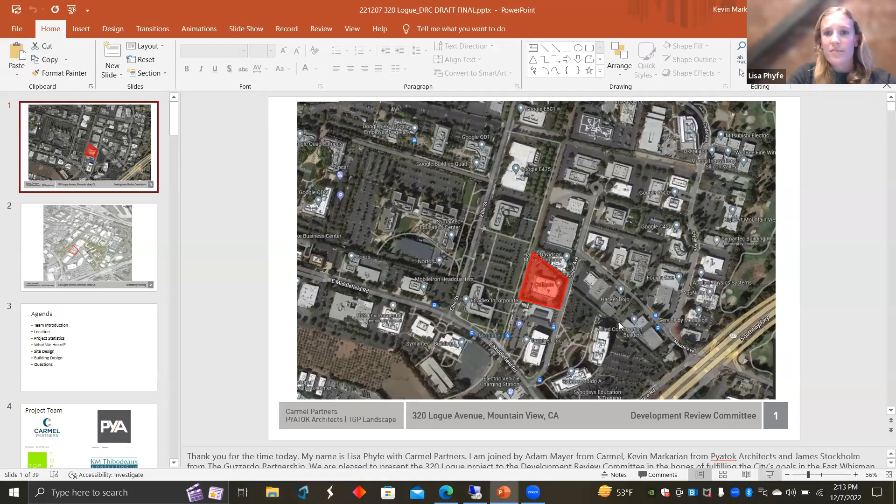Thank you to the Development Review Committee for your time today. My name is Lisa Phyfe with Carmel Partners, and I'm joined by Adam and Greg from our office, as well as Kevin from Pyatok and Daniel and James from the Guzzardo Partnership. We are here today to present the 320 Logue project to the DRC committee for the second time. Next slide.

As a brief reminder, the 320 Logue project is located within the East Whisman Precise Plan, right adjacent to the VTA rail, and is in the vicinity of the Google Middlefield Master Plan project. Next slide.

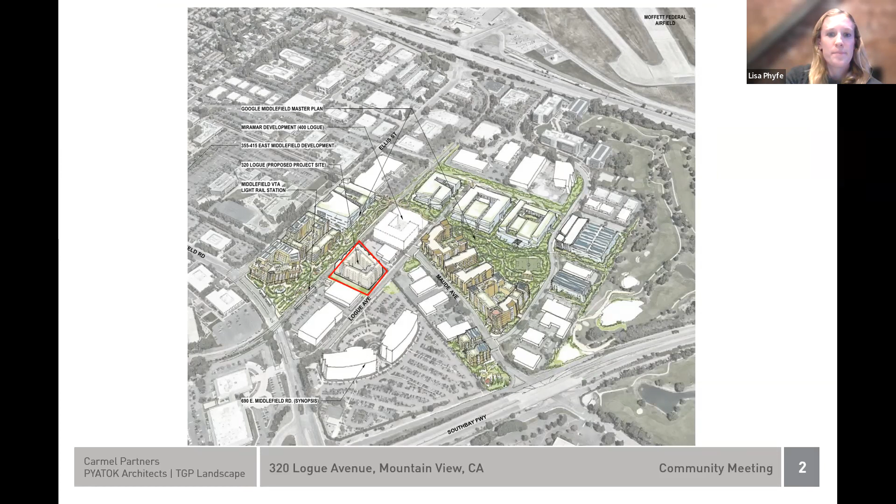As a brief agenda for today, we're going to briefly introduce the project, go over a few items that we heard from our first DRC hearing, and then we will present the updates to the site and building design in response to that feedback. Next slide.

As a reminder, the project team: the developers, Carmel Partners, and we're joined by our architect, Pyatok, and landscape architect, the Guzzardo Partnership, and Kathy Thibodeau is our community liaison for the project. Next slide.

As a brief reminder, the site is a 2.14 acre site. We are proposing a project with an FAR of 3.5, which is 366 units, a mix of studio, 1, 2, and 3 bedroom units. There are 55 on-site affordable units. As Rebecca mentioned, the proposed project is 7 stories over 3 levels of subterranean parking that include 412 parking stalls and 412 bike parking stalls. Next slide.

Coming out of our first DRC hearing, we got some feedback on our site design, the building base, the corners, and the Logue facade. At this point, I'm going to turn it over to our design team, Daniel and Kevin, to touch upon our progress in response to these comments.

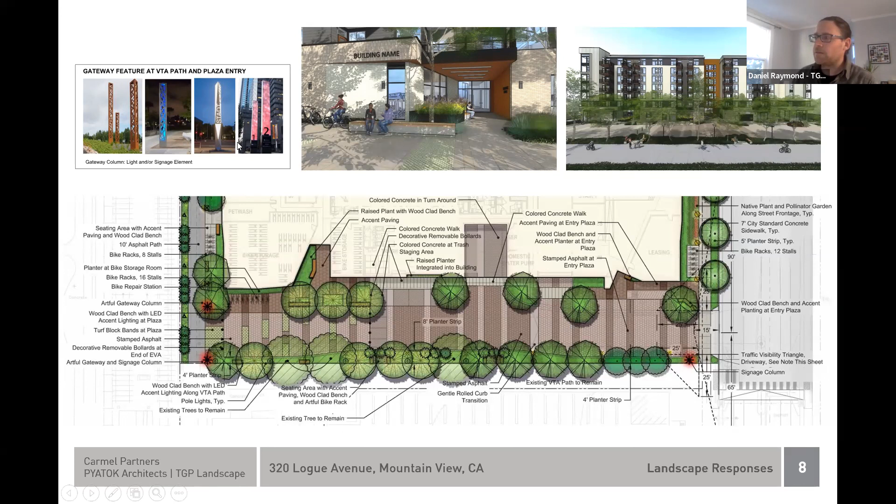A few other comments on screening the utilities on Logue: we're a fan of using planting to do that instead of a built structure like a fence. Here are some planting options that do a great job of screening utilities, and the majority of these are native plants.

There was also a question last round about the screen along the western property line at the VTA tracks. This detail elaborates on that - it would be a 6 foot tall CMU block wall. In terms of color and finish, we're looking to the building facade for inspiration, matching the brick color and pattern to have a cohesive material palette.

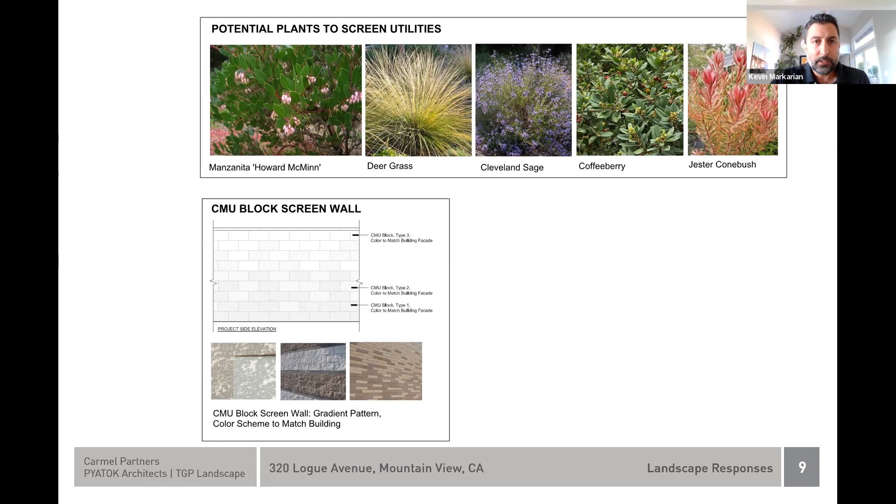Thanks, Daniel. We're happy to present some updates we've made since the last meeting. I'll start with our early design process. We've been very open sharing how we think about design and what ideas we thought would work really well fit to this site. This is a reminder of where we started and the iterative process we've had with planning on developing the language for this building.

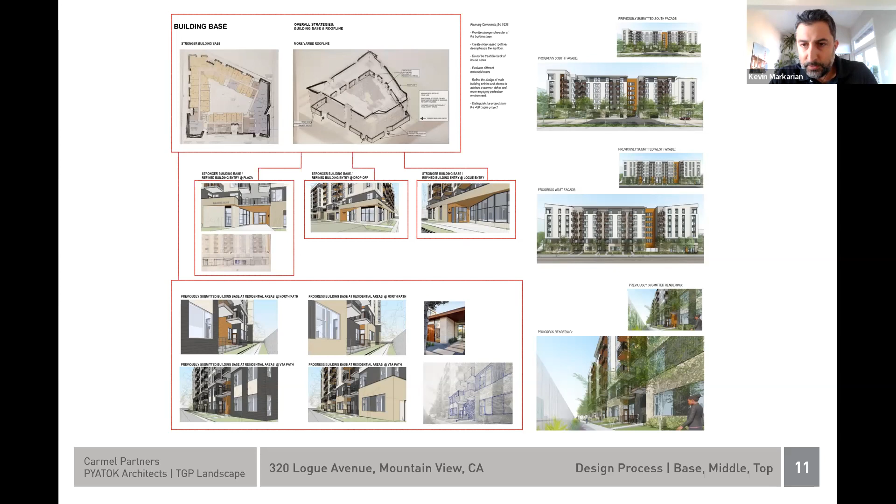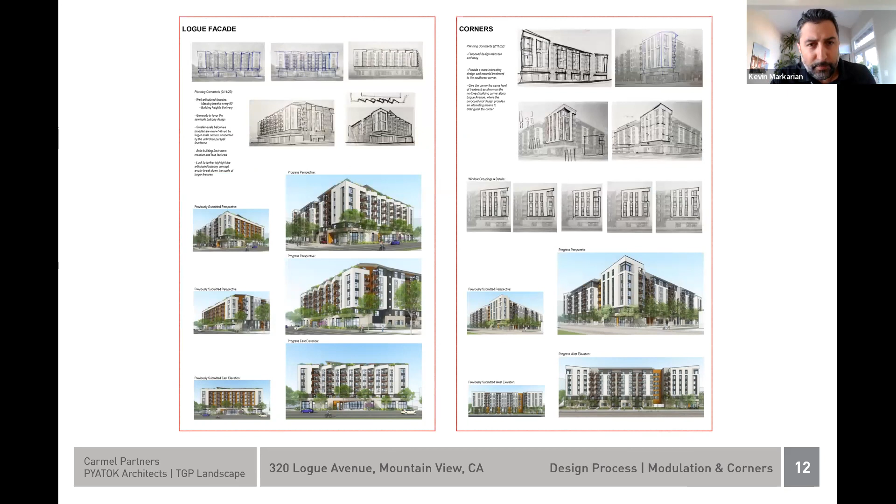The first few slides show those initial ideas and concepts. I won't spend too much time since these were presented before, but it shows how we had this iterative process of improving the base and roof line of the building and articulation. In each of these steps, that refinement was a very informative and collaborative process.

When we got the last round of comments, I'll hit on the main things we heard, which was making the roof line a bit more continuous where we could. I can show it on the larger renderings, but just having more of a linear connection across where we could extend trellises, cutting back parapets over balconies, helping reduce bulk, but then also streamlining that roof line.

Reducing the heaviness of the building at the corners by maybe eroding them, looking at the way the panels are expressed, looking at our window openings, having a more cohesive base. Especially connecting along the west side facing the VTA tracks, it was a little too broken up for this group, so we found ways of connecting it, making it stronger, and enhancing the screening of those on-grade patios.

I think James, and we worked with James and Daniel, on the improvements of making the drive aisle more cohesive, both in plan and also improving that facade. We relocated a service door, I think also to help improve that facade. That was the other response integrated with his solution.

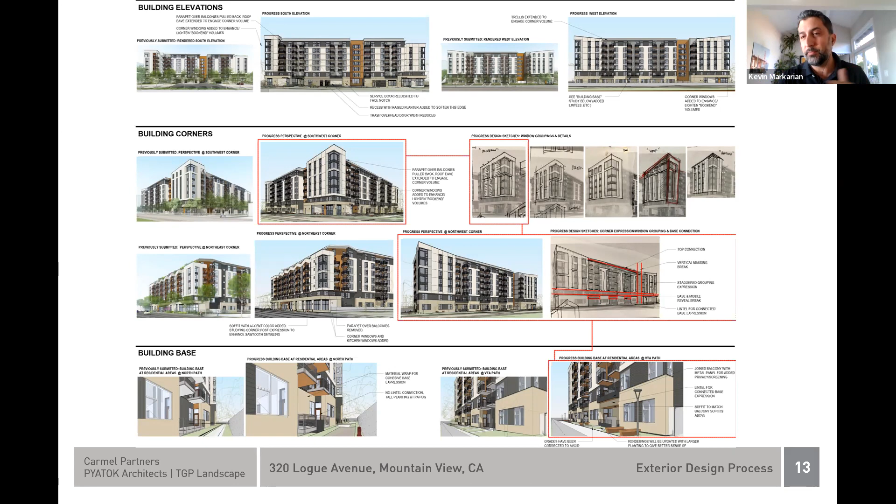I'll start by mentioning that we also provided a materials board, and in our submission went through much more detail, both in the elevations and providing this board highlighting the different materials and where those are provided.

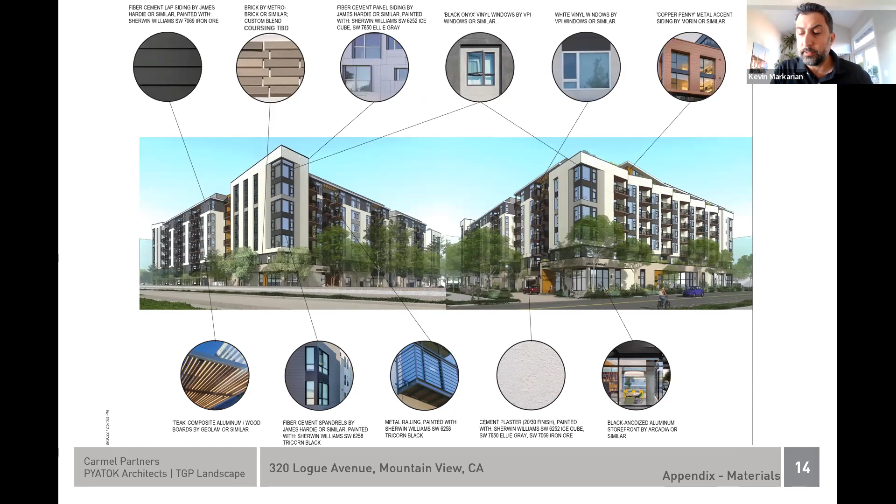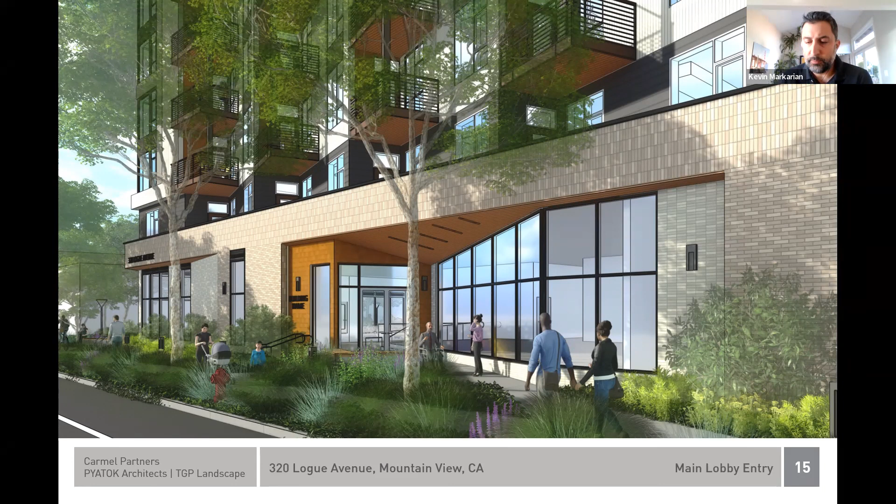We can come back to this at any point, I'd be happy to discuss it, but I think the renderings have much more clarity. I think they were a little washed out last time, so some of these were redone showing the design intent with the brick, siding, and different accent materials we're talking about. The contrast was just a little off in the last one, so this provides a better idea of the design intent.

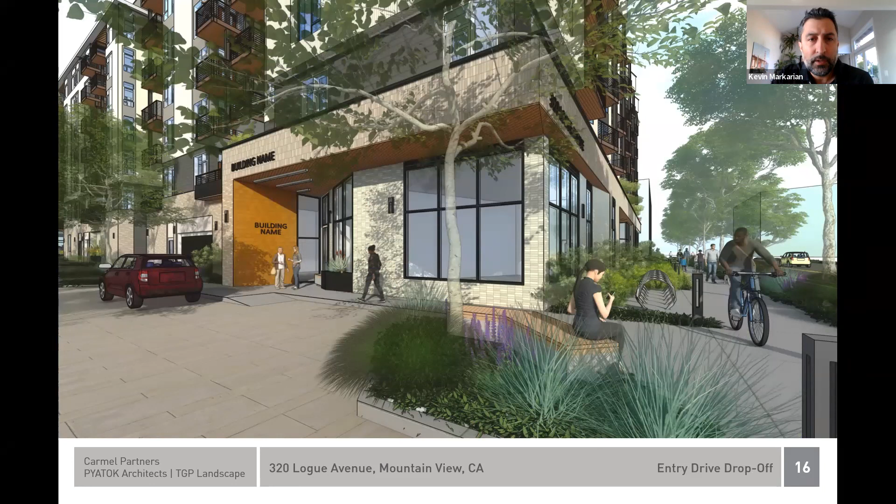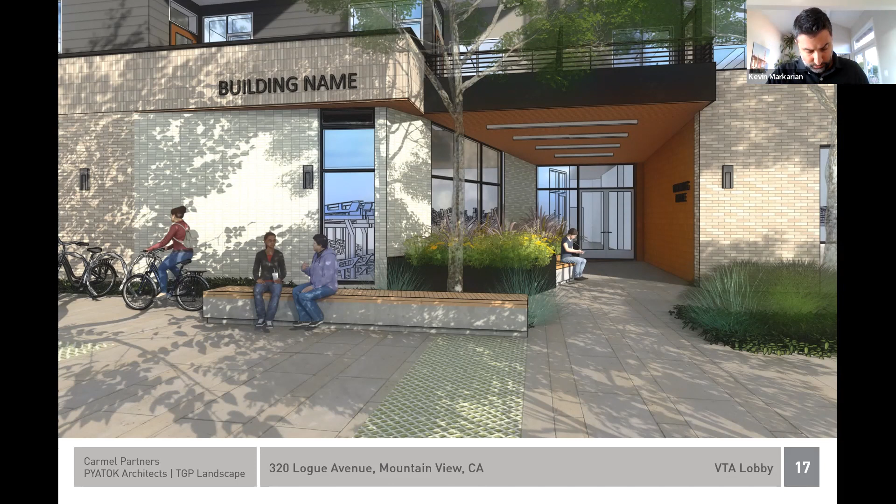Same thing for this ground level view, and then we walk around. This is our entry from the VTA station side, showing a little more planting along where we have the bike room, but again just some improvements to materials and textures. You can see how those paving patterns, wall materials, and seating all integrate, and we have more planting at the base here.

Some of the bigger moves in response to the comments before: we extended that roof line across here and also here. That was a good suggestion, and it helped reduce the bulk of those corners.

We also show the panel pattern more clearly of it being broken up, but also eroded those corners, studying both the window groupings, the vertical bands, but also opening up the corners more, and cutting back that parapet over the balconies on these corners, making the corners less bulky. We felt that really helped streamline things.

That covers this one. Then you come around to this side - same thing here, we extended this trellis across. It helps feel more linear, more connected, integrated, and then you start to see the integration of the base as well. I think the next slide shows it more clearly, but this also shows the corners have been improved on this one as well.

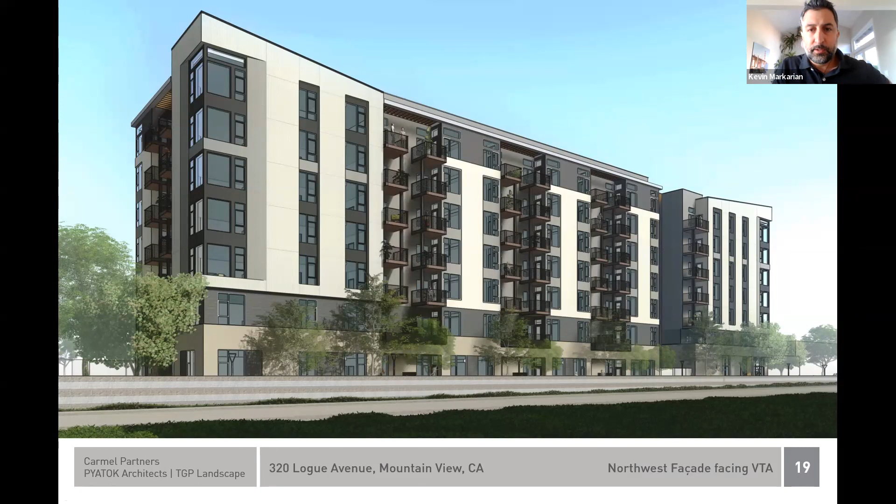This is a close-up view. We talked about it at length - the grading has been corrected. I think there was some ramping and some strange pathway grades, and so that was corrected.

We're starting to show the wall that Daniel alluded to on the far left. You see the screening between the units with a vertical panel that helps provide some more privacy, as well as the planting to help provide more privacy for those units, but then they still feel connected.

The big move was really introducing that lintel across the top to help integrate the base. This was a little too fragmented before for this group, and we felt like this was a good suggestion - bringing this lintel across, strengthening this base, and changing the railing a little so it has a solid panel providing privacy for those units, while delineating that what's above is more open and airy, and what's at that datum is stronger. This also helps meet our open space requirements by projecting, but it's also a little different.

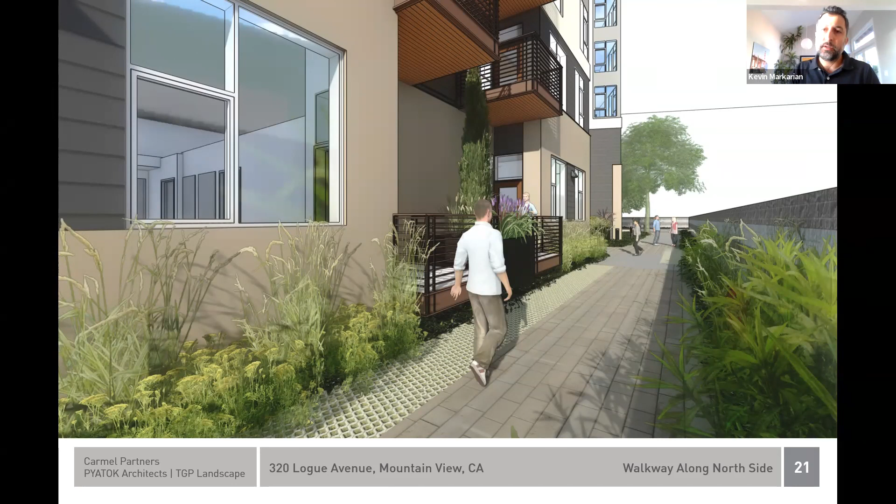I'm going to walk around more. This side hasn't changed too much - just some improvements with the planting and pathway that happened before, and it shows the wall, the idea for the wall along the right side.

This view shows some windows added to the corner near the kitchen to help reduce the amount of blank wall. This is the kitchen back here, and we have our panel joints. We opened up this corner more, and then we cut this parapet back, which also helped reduce the bulk of that bookend.

Another comment was just kind of understanding how we could refine our sawtooth. This is our facade facing Logue. What we did was we brought this accent panel color up into the soffit and are studying, and we looked at the expression of the column and railings to help really articulate it. I think the devil's in the details. We're going to work on this more with our structural engineer and waterproofing consultant as we develop this, get into the construction documentation, but feel there are some really great detailing opportunities there.

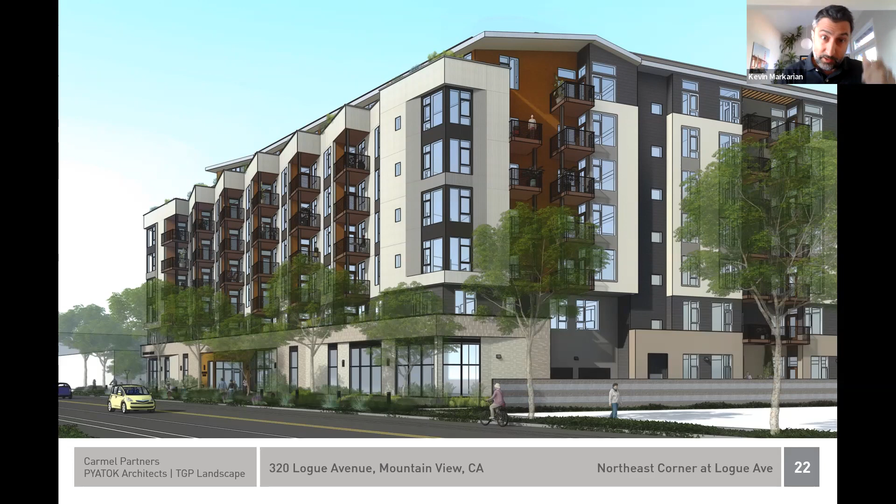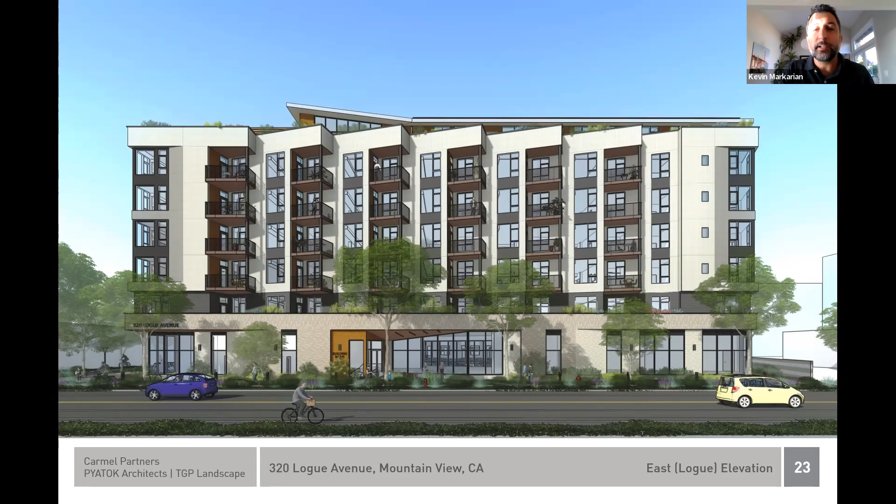This is walking around, you can see the sawtooth. We also, I forgot to mention, improved the planting along the roof line - we had a comment it seemed like a little bit much, kind of overly optimistic, so we cut back on that. This is back on the Logue side at our main entry, showing again those improvements to the corner and the other ones we've mentioned.

So with that, I will say thank you, and we value your feedback. I think it's been a great process up until this point. Thanks.

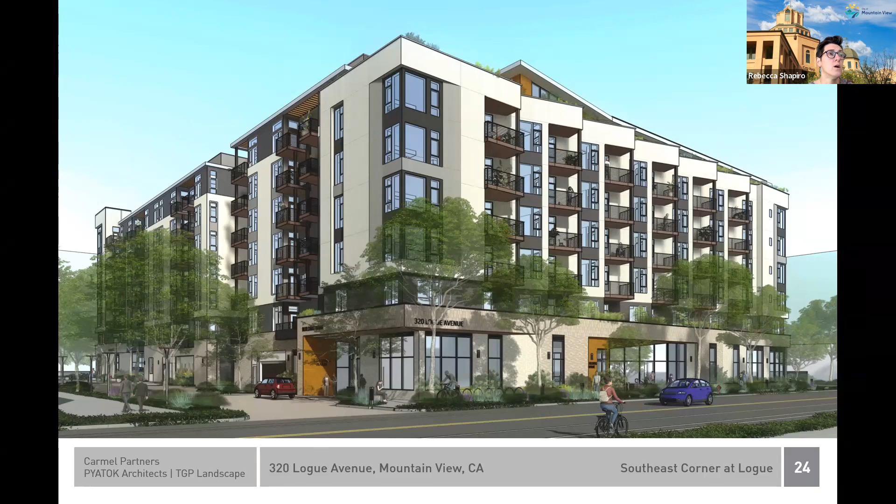The second comment, specific to this particular project, noted a couple things that were really targeted to making it super convenient for walking and biking through design, in order to create healthier, safer cities and meet climate goals. There were a couple specific recommendations. First was for bicycle parking rooms in the project to have doors that lead directly outside for convenience, but also to limit some of the incompatibilities that can exist between more generally used circulation areas and bicycling, particularly during inclement weather, where mud, dirt, and other things get tracked into buildings from bikers.

Second would be focus on the north side of the building, where the recommendation was to incorporate direct access from the ground level patios to the sidewalk in the north setback area. And I think we'll touch on some of those in our DRC discussion today.

So, first, picking up where Kevin left off, I would definitely agree that we've had some very good conversations, both at a staff and a DRC level on this project. One of the things we've been remarking on is really how useful the design studies and design strategy diagrams you've incorporated in your plan set have been, not just in illustrating your thinking, but helping us more broadly understand the goals from a design standpoint, and it makes it easier for us to do our jobs. So I'd like to, I think I talked about this last time around, but I want to again thank you for being so open with those materials.

There are a few things we'd like to touch on the site plan that are really fairly targeted, and I'm going to try to quickly run through those items. First, just regarding the above ground equipment screening that James touched on.

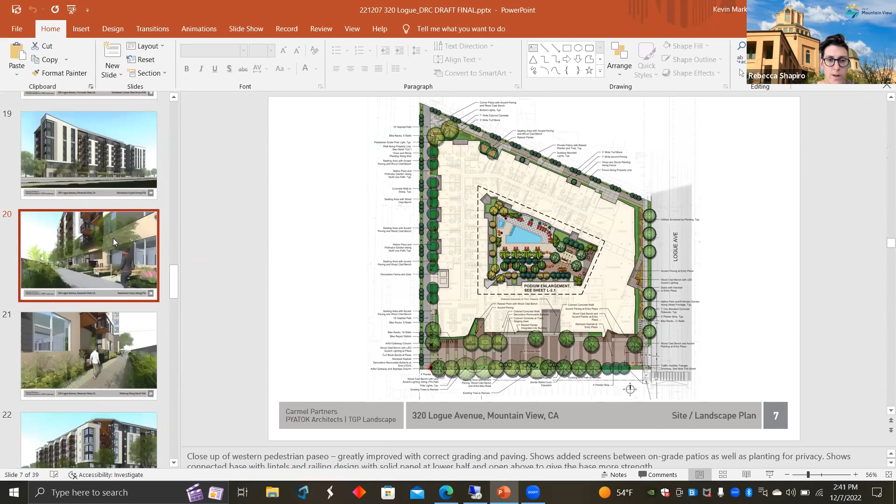So I guess, could you bring up a west elevation view? I think most of the more important things we wanted to chat about with you today are west elevation focused.

Linda, do you want to start with stoops, or do you want to start with windows? What do you think, stoops or windows as a starting point? Oh, well, let's start with stoops. I think that's a pretty straightforward, easy one.

We wanted to be sure that the stoops were more emphasized. One simple solution was to introduce some color into that back wall of those little courtyards, which would bring some more attention and make it pop a little bit. Right now it's recessed, but there isn't a real differentiation. I think using that soffit material in there is a great idea, and maybe there's a way to bring some of that color or a different accent color down onto that wall. That was one of the things we thought would emphasize those a little bit more.

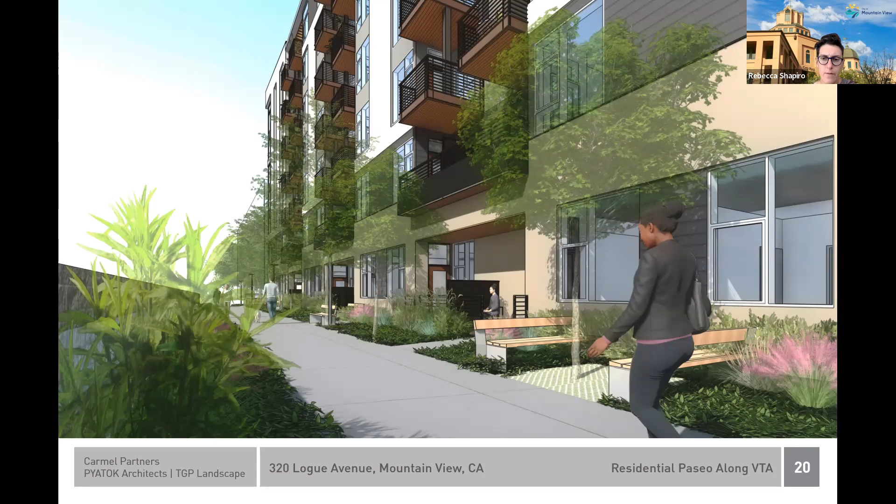Could you go to the kind of full bleed 3D view that you had, I think, on the prior sheet?

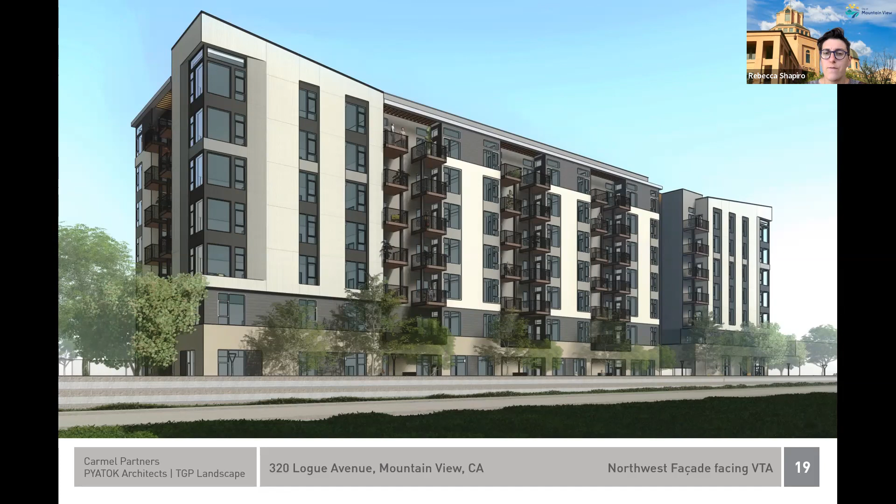One of the other things that caught our eye, just in this view in particular, was that we found the changes to the corners to be a notable improvement from what we had last seen, and we really appreciated seeing the various options you'd studied. I know you'd gone over those with staff, but it was also useful for DRC to see them as well. On the right-hand side, the southwest corner of the project, one of the things that caught our eye was the proportions on those vertical slots that you have there.

Those two narrower window stacks felt a little poorly proportioned. One potential solution: I realize window widths connect to what the interior of the unit is doing, but one thought would be widening that right-hand stack of windows to be consistent with the living room windows on the left side of the three stacks. The proportion of window area to solid wall seemed a little off, particularly in angular views of the facade.

My initial thought was if it just had two slots instead of three, like the other end does, but understanding floor-plan-wise that wouldn't work at this corner. So it's a matter of looking at the width of those two more slender slots, whether making the one closer to the corner a little wider. Just take a look and see what you might be able to do.

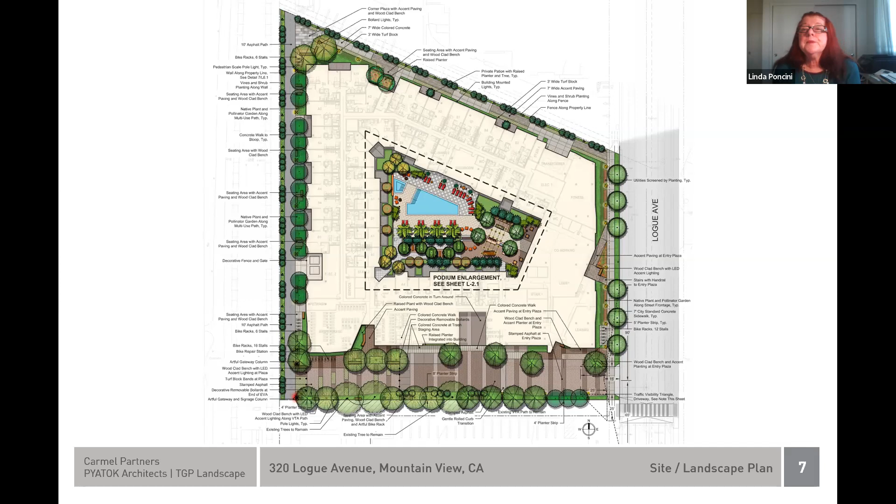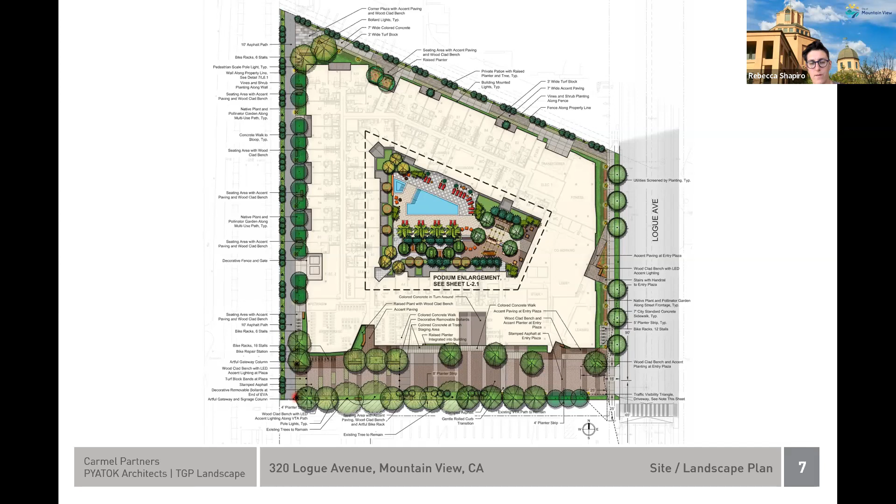Agreed. I want to briefly touch on the south elevation—I think you glossed over some of the changes there, and some of them seem really small. We tend to look at whole facades and can lose sight of the details, but someone walking along the building will appreciate that small planter nook you were able to create, and losing one utility door. Those are incremental changes that make a difference—maybe not from across the street, but certainly when you're walking along it. So I want to compliment you on those changes.

This utility area is still part of a pretty public interface with the site. You're carrying the brick through as your design strategy, so in keeping with both prominent visibility and the upgraded base materials you're employing, I'd like you to look at how you can design gates, doors, and other outward-facing elements to these utility areas and garage entries so they feel architecturally additive, not just utilitarian. They need to be durable and appropriate to their rooms, but we want them complementary to the high-level architectural design of the walls around them.

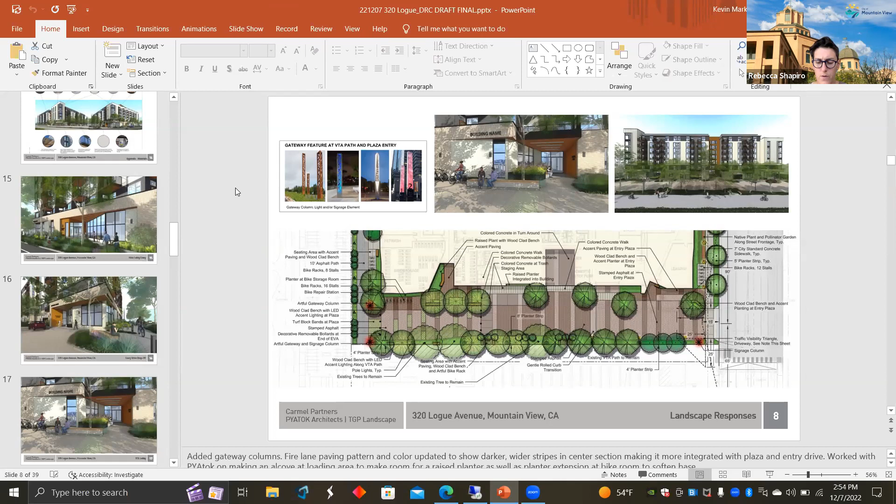I believe it's a Hardie panel that will be painted, painted to basically express that edge, because what we're proposing is wood balconies, but we want that to feel finished and integrated with the railing. So we're going to put a finished panel, wrap the edges, and have it be the same color as the railing materials.

Okay, so sorry, the fascia will match the railing materials, or the soffit materials, soffit and decking materials? It would match the railing material.

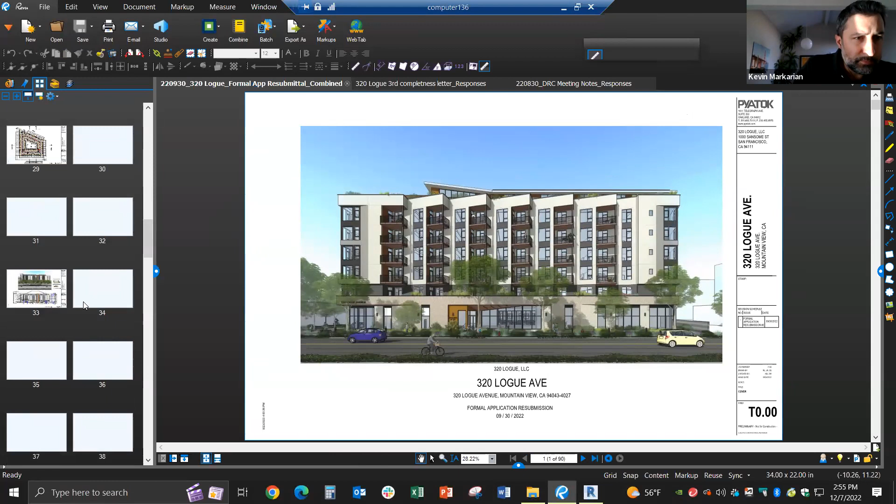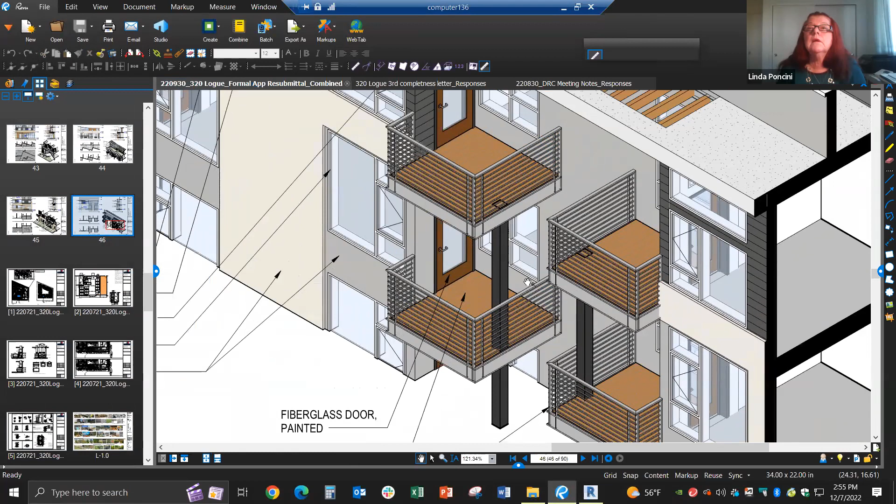It's painted, I believe. It may be slightly more clear here... let me look. Graphically, I mean, that's what we're showing - that it's painted to kind of match the railing material.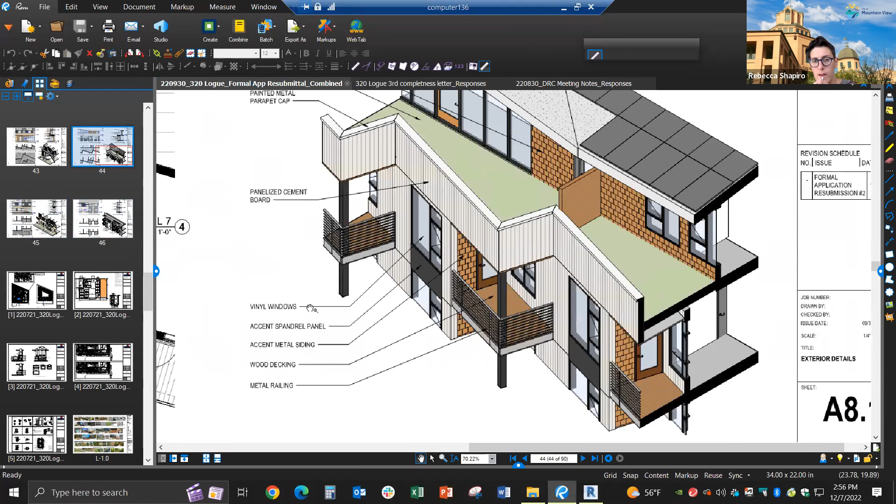Okay, yeah, so it was kind of interesting - these detailed views and the elevations sort of showed it in a lighter color, which on zooming in you can see kind of matches the railing. But several of your 3D views give kind of more of a warmer tone. Yeah, the color is not quite the same.

To be honest, the warmer tone kind of really appealed to me, and I kind of like the idea of, since the soffit and the decking have this wood material, of that kind of pulling through the fascia - at least in regards to color. It needn't necessarily be the same material.

Linda, do you have thoughts on that? Yeah, in terms of the fascia of the deck, correct? Yeah. I personally think it shouldn't match the wood - I think it should be more related to the railing itself. I think what would be helpful for staff as you move forward would be to really provide a detail of that, because just looking at the way it's rendered, it almost looks like it's a wide flange of steel.

So it's meant to kind of look like that, but it's finished - it's not exposed wood, so the intent is to make it look finished. Yeah, so I think the details on that will be important for staff to review, because in the renderings it does look quite finished, but it has a fair amount of detail to it - it looks like it's got detailing that reflects where the railing corners are coming down and the posts. Yeah, I'd agree, so this is definitely one of those where a clear detail is needed.

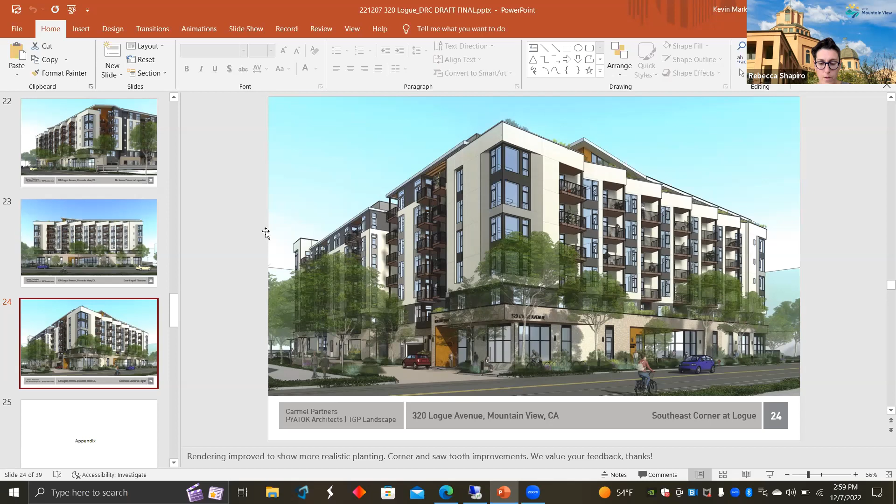And then I'll just add, because I finally looked even closer at the brick patterning you've shown in the 3D renderings - I think the way you're using differentiated patterning, with at least three different conditions, really helps create more interest and dynamic condition at the base. I think that's going to be effective, so we do want to lend our support to the approach you've proposed there.

One other comment on clear information in the plans: most of your 3D views have indicated that this orangey metal panel system is going to have some sort of smaller increment patterning to it, but there wasn't a very clear specification, so we couldn't tell more precisely what that pattern was actually going to be in a real world example.

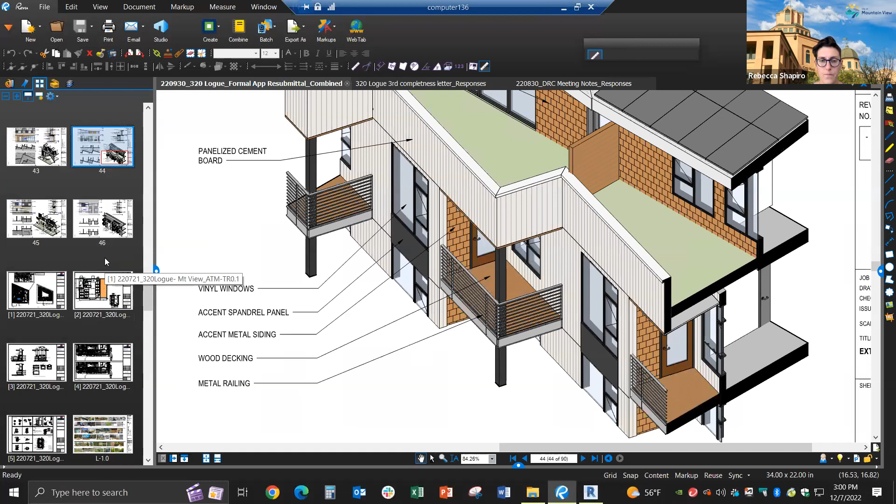So we want to make sure that what we're seeing in the 3D renderings is something that's going to actually be what you're showing. It's a metal shingle, okay, and it's on our... yeah, so the photo didn't appear.

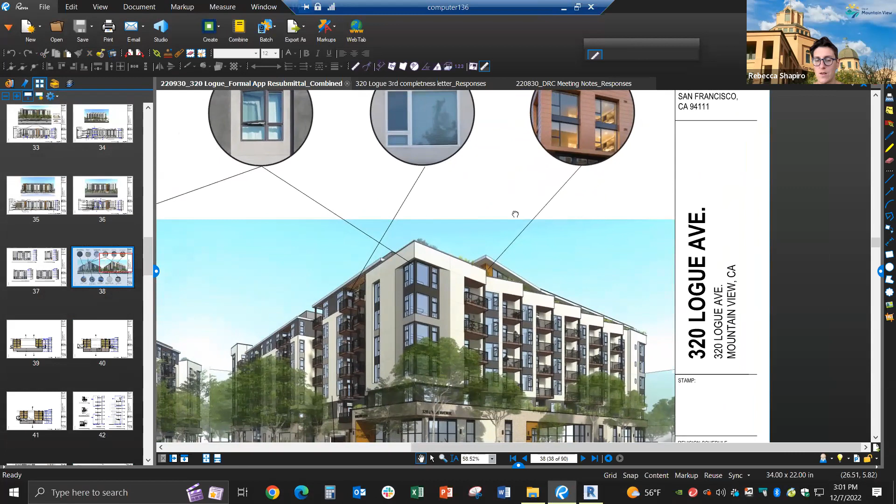I realized it was really small, like a shingle, in the manufacturer specifications, so it was hard to close the loop. I think the 'or similar' notation gives us enough flexibility to make sure you can actually get something from someone in your construction timing, since getting materials is still hard right now with supply chain issues. The starting point is just making sure what you're specifying is consistent with the elevations and renderings. We like that smaller increment shingly detail, I think it's effective. We just want to make sure it carries through the other sheets.

We have three, or maybe just two, final recommendations for you today connected to windows. One thing we've been considering is that this is actually a pretty large building, and you've been very successful in creating smaller scale in what is a pretty big building. So it could be that you just don't notice some of the fine grained details unless you really zoom in.

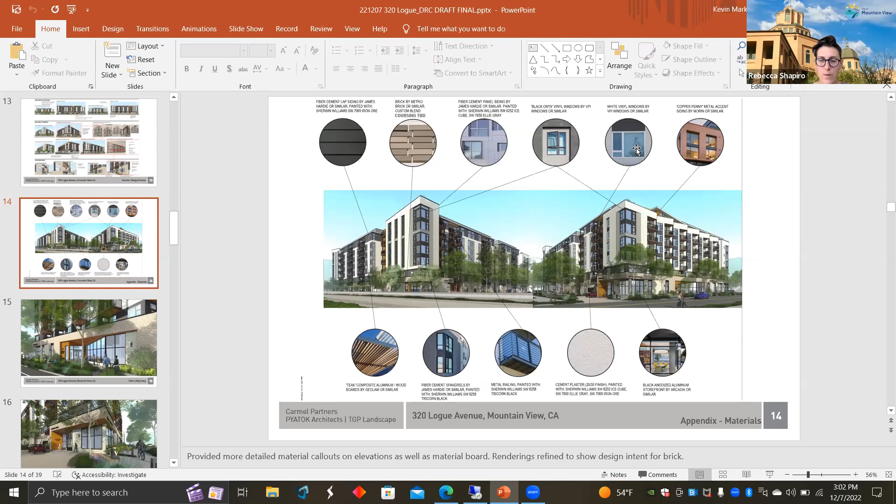But we understand from your material sheet that you're proposing a mix of white and black vinyl windows in the designs. That's correct, right? Yes. But when we were looking at the elevations and 3D views, we weren't actually really picking up the white windows very much. Like I said, it could just be a scale thing when looking at a facade view, but...

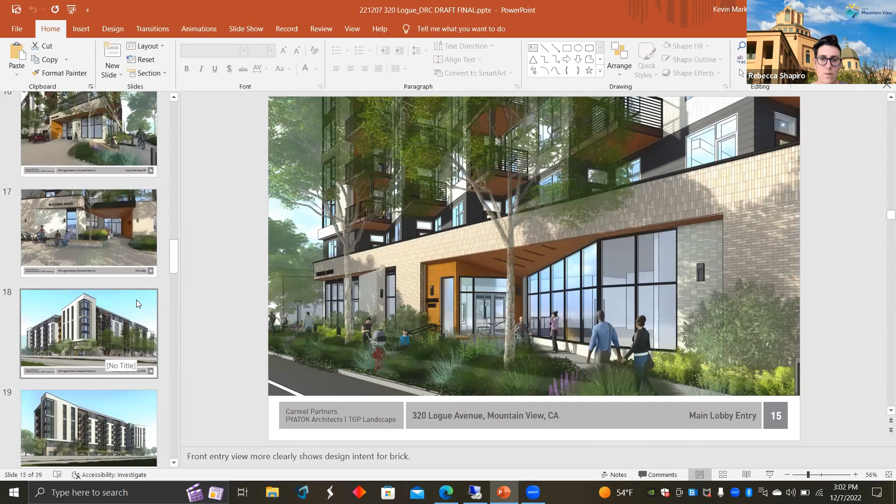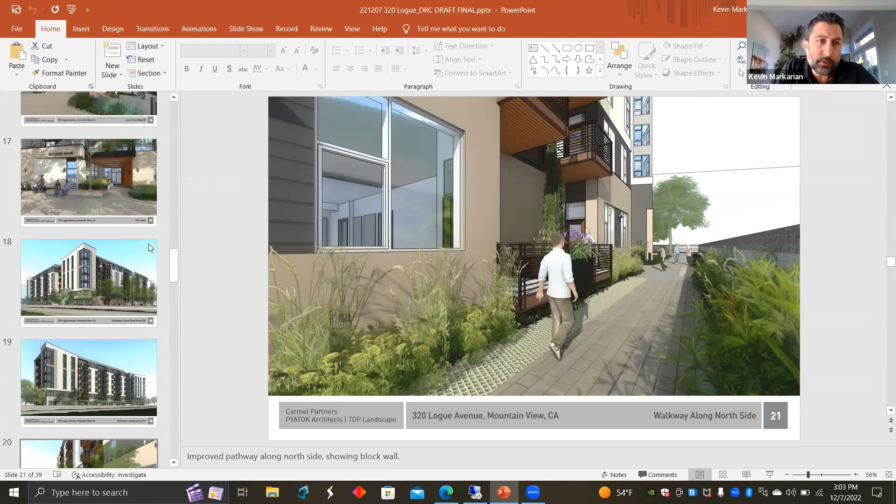It's like on some of the white walls where I'm presuming... actually maybe I should check myself. Are the white vinyl windows on the darker wall areas, and the darker windows on the light colored walls? It kind of shows up in the 3D views, especially close up. They're outlined, so they're crisp, but they show up mostly in the middle sections versus the corners. So it goes back to the original early diagrams.

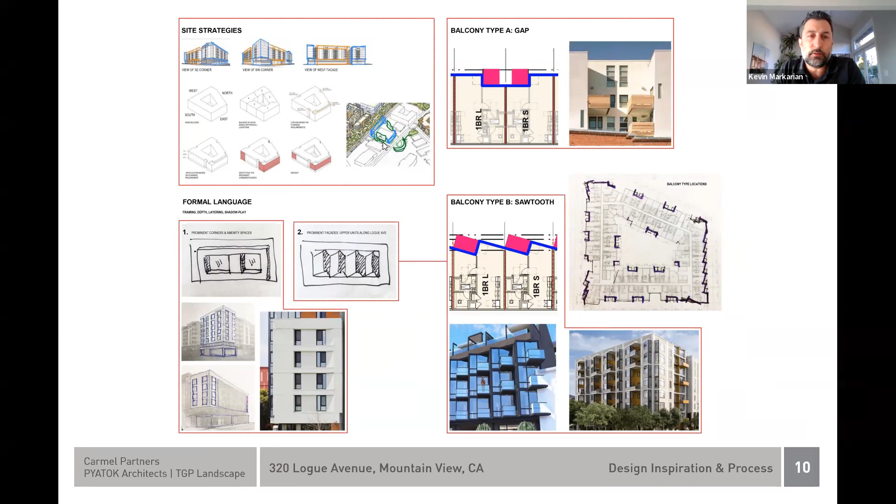If I were to highlight it on a plan, it would be clearer, but this frontage is the darker windows, and it's along the bases as well in some cases, but it's really these corners that get the darker windows. That's the key, and then the rest of it's white. Okay, so it's not based on...

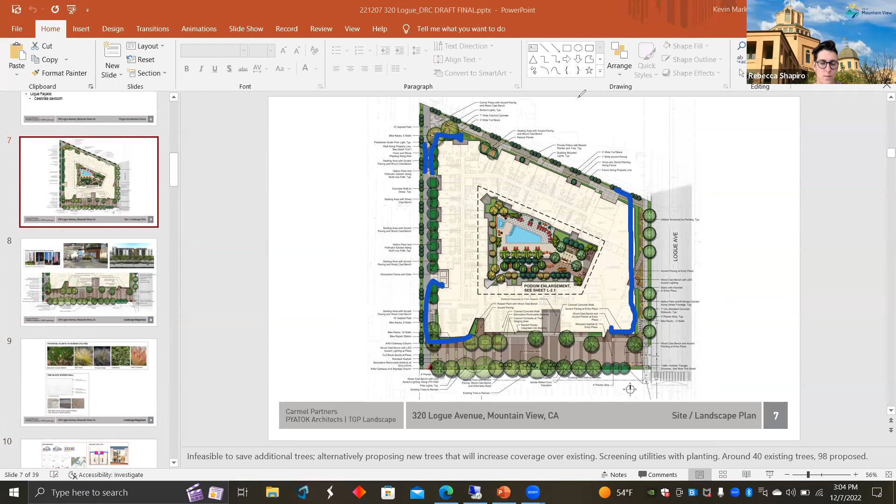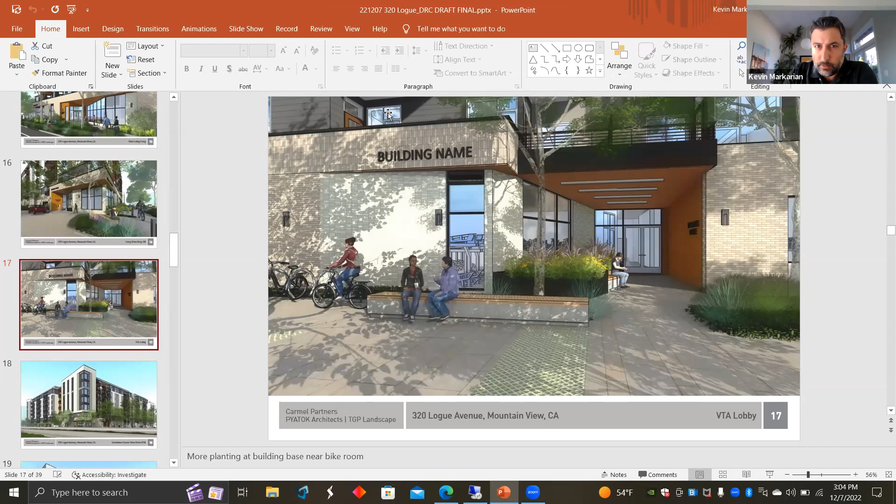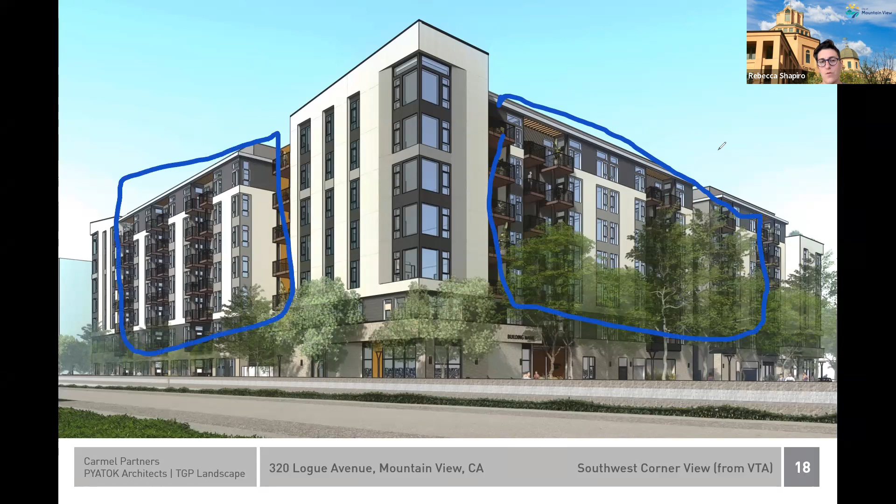I think it was more discernible in these really zoomed in views. It was just when we looked at it from further out, we were like, is that middle portion of the facade - are those actually white windows? They look kind of gray, like the color around them. So it may just be hard to review legibly at a zoomed out scale, given the size of the building.

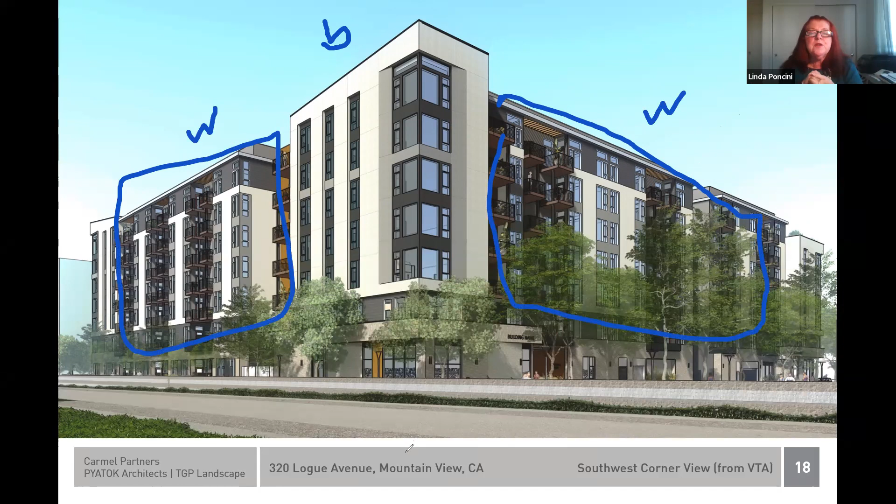So I just wanted to make sure that's what we were assuming, what you've drawn is in place. Yeah, that makes sense, that works. Fine, yeah.

The window details on sheet A8 - the key thing we wanted to recommend was actually what you touched on there: we appreciate the recessed window condition on stucco here, but would recommend that it be slightly tighter. It seemed like that recessed window plane has like a 2-inch frame around it, and you seem to be using a sort of foam wall exterior insulation or something. So we'd like to see that pulled tighter for a cleaner recess detail if at all possible.

It seems also more true to what we were...

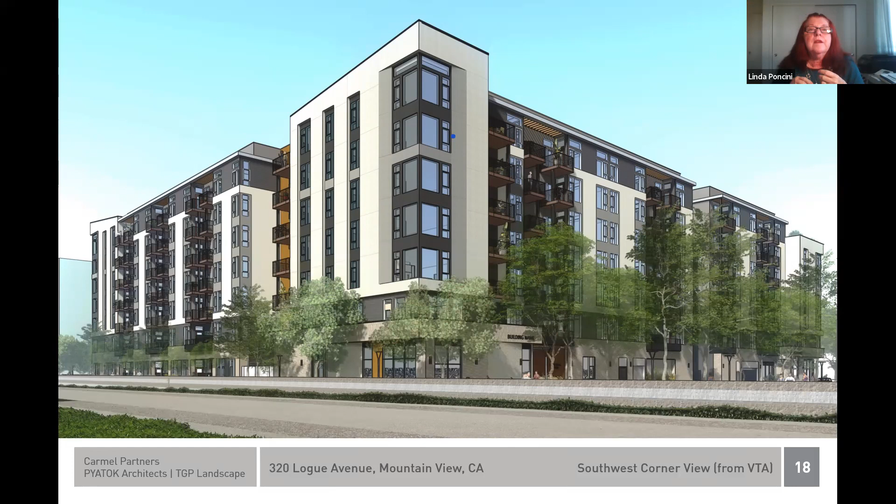Yeah, that's on detail 4, detail 4 on A8. It's sort of like a frame around the frame. We thought it would look better to have the plaster on that foam come straight back to the window. Hard to explain, but...

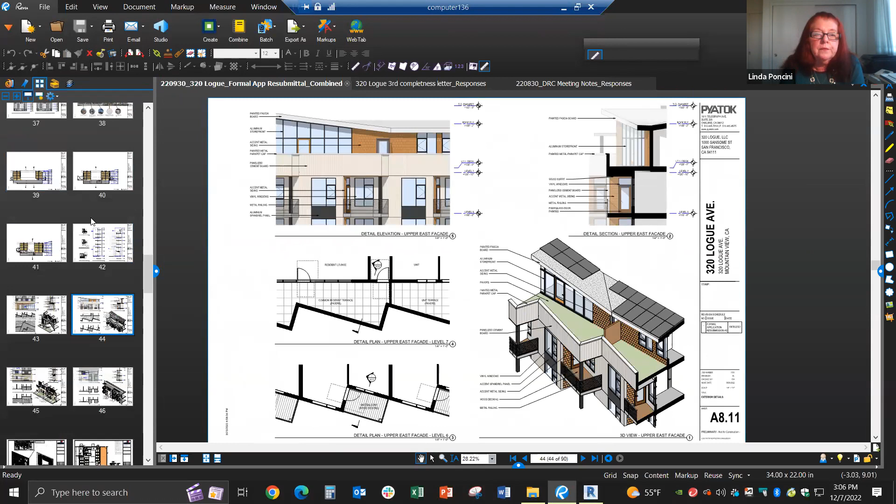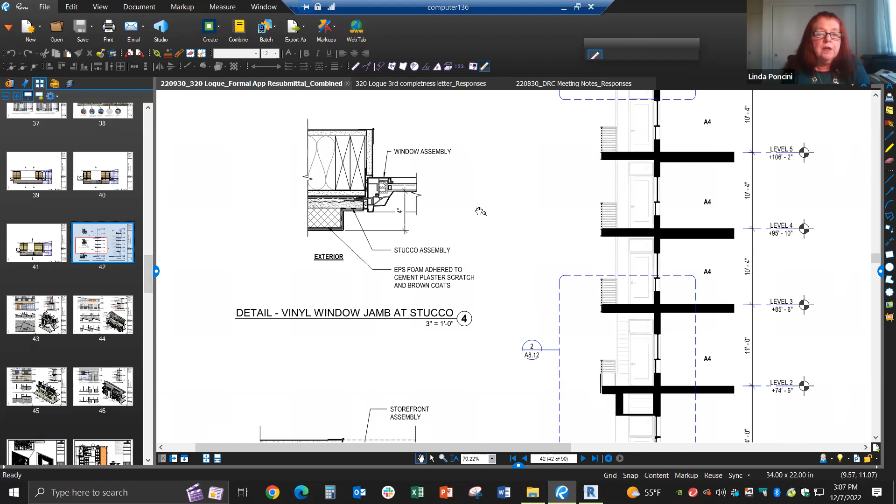Yeah, exactly, that one. Come closer to the window, is that what I heard? Right, so it would just come straight back, similar to what it's going to look like on the thin brick. That return on the brick comes straight back, right? It doesn't have a jog in it. Yeah, exactly.

Our final recommendation is on the wood accents you've called out, principally the ground level entry soffits, balcony soffits, decking, and maybe one or two other locations. The material board calls out GLM or a similar product. We have experience with at least one line of GLM products, and our review of photos from the GLM site suggests it doesn't have as natural an appearance as we'd want, particularly in locations used closer to pedestrian level. So we'd like to see an alternate spec for that product.

And I think that actually wraps up our notes for you today.

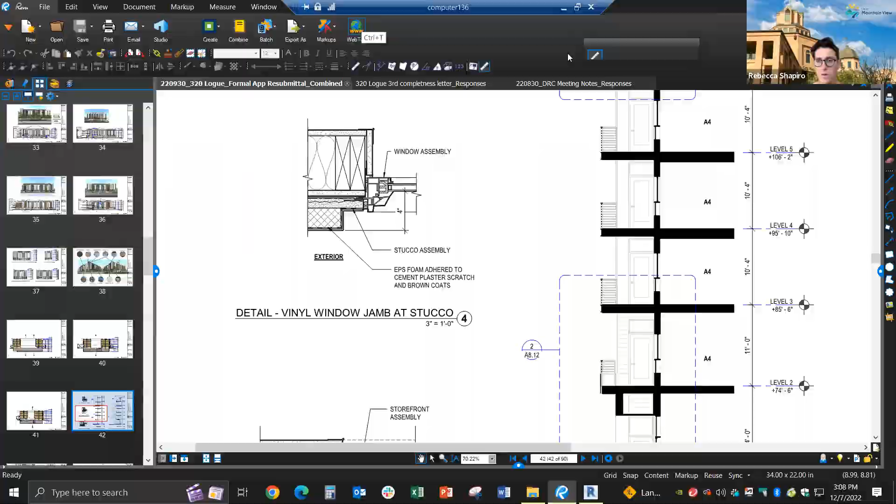So unless you have any other final questions, I'll wrap up by saying, I know you have a little bit of time before the CEQA document for your project is complete. It's always great if we can have as many of these recommendations addressed in the plans going to council and EPC as possible. If you're pressed for time, I'd focus on items that are more pedestrian focused and on clarifying information in the plans, because the entitlement set of plans is really our basis for subsequent building permit reviews. So not having confusion about specifications or details is really ideal.

As I said at the top, this was a great second review because the things we wanted to talk with you about were pretty targeted and focused, since you guys did a very good job addressing our prior feedback. So again, just appreciate the work you've all done and the collaborative perspective you've taken on this project review. Nice project.

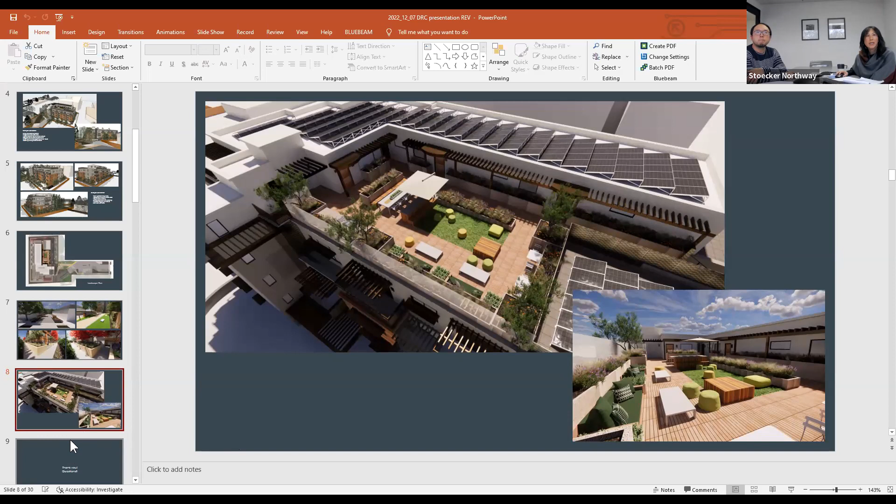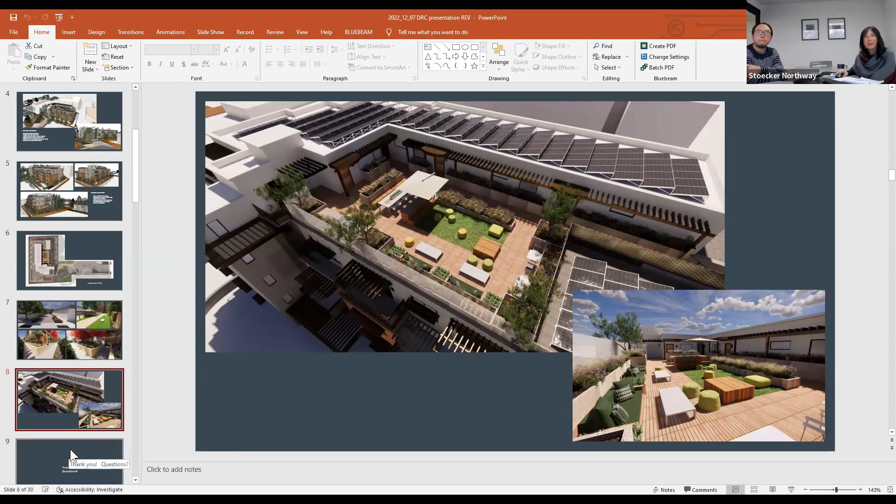So we wanted to really take into account all of the feedback we heard from staff and the community, and are looking forward to hearing for the first time what your input for us is. I appreciate everything. Hopefully that kept it short and sweet, and welcome any of your comments.

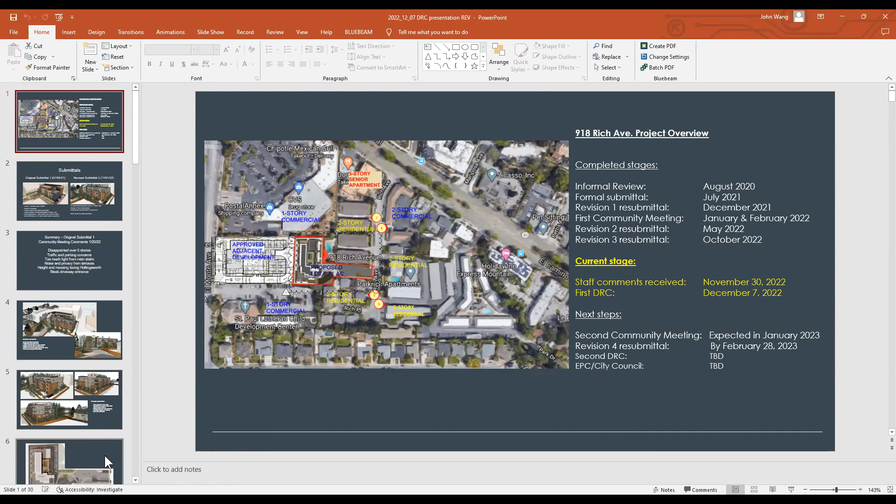And then which way is traffic coming in and out? My biggest concern would be any kind of garbage truck coming in and out, and any kind of emergency vehicles, which probably isn't a constant like it will be with the senior residents on El Monte. So which way is that going to be coming?

So coming down, I'm going to flip back and forth a little bit. So here's Rich Avenue, and site access would be right off of Rich Avenue, in and out. And then if I go back to this plan, the trash room is actually in the basement of the building, and on trash days the bins would be pulled out to a trash staging area right here, so that trucks would come off of Rich Avenue, pull in, grab the bins, pull out, and go back out down Rich Avenue. Okay, so they'll be closer to Rich Avenue and not all the way onto the property, which is okay. Correct, okay.

I guess my only other comment would be those trees, in the spring and summer and the fall, will be providing a nice block. If there's a way to make it, I don't know if you could get some evergreen in there at all. Otherwise, I throw my hands up to progress. Thank you for considering us neighbors who've been here so long and are used to a very different living environment.

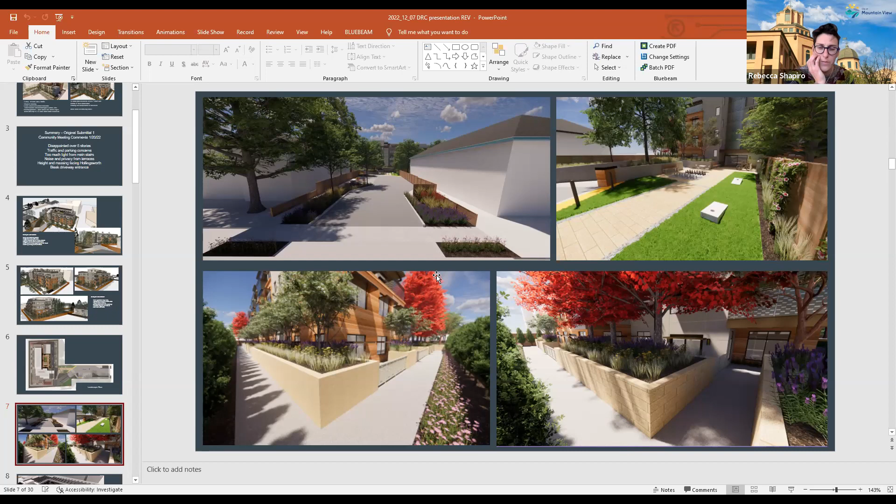The other thing to study - I know you received fire department comments about the Grasscrete proposal in that entry plaza area - but what are the other materials you were looking at using there? They're pavers as well.

Okay, pavers. So one thing to consider with the entry drive is something that picks up on the paver patterning at that entry. And I'm sad to lose Grasscrete, but I'd encourage you to see what you can negotiate with our fire department staff that meets their load requirements but is a little softer than just a 26-foot wide set of pavers. It'd be nice to have something softer there. I know you may have some limitations, but I'd encourage you to be dogged and work with Aki to see what options you might work out.

One thing I would mention, Rebecca, is that on the other project we reviewed today, they also had some turf block on their drawings, and that project is a lot further along. So maybe Aki could look into that, because if that project, as far along as it is, has turf block, there may be something that is acceptable to the fire department.

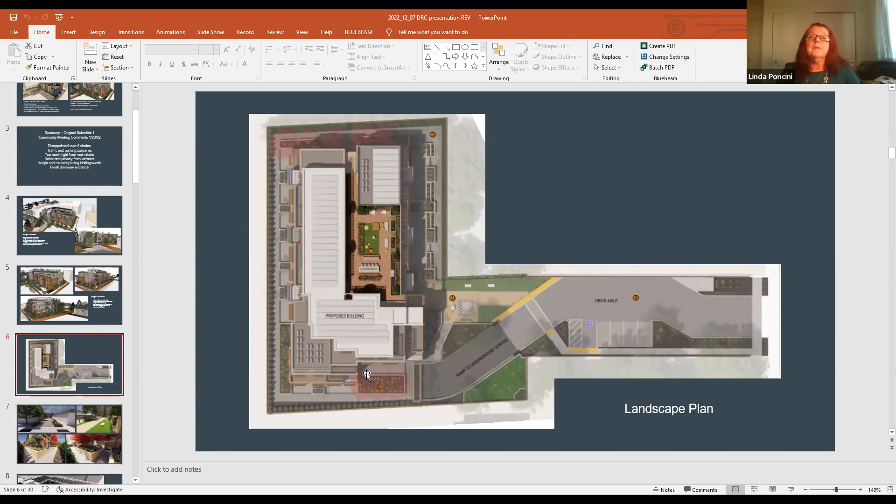I think we saw a little bit of success with the memory care project, actually adjacent, with some alternate configurations, but I do know our fire staff are very particular about what they might consider and how it's laid out. So it's an offline conversation to have, but I encourage you to work collaboratively through Aki with our fire staff to see what you can come up with.

That actually wraps up our site related comments. I think, like you said, it's a tough site to crack. And I think you've made a lot of progress in addressing the earlier feedback you received from staff in the community. So I think the comments today are really about refining what you've been able to achieve so far, and taking it just a little bit further along.

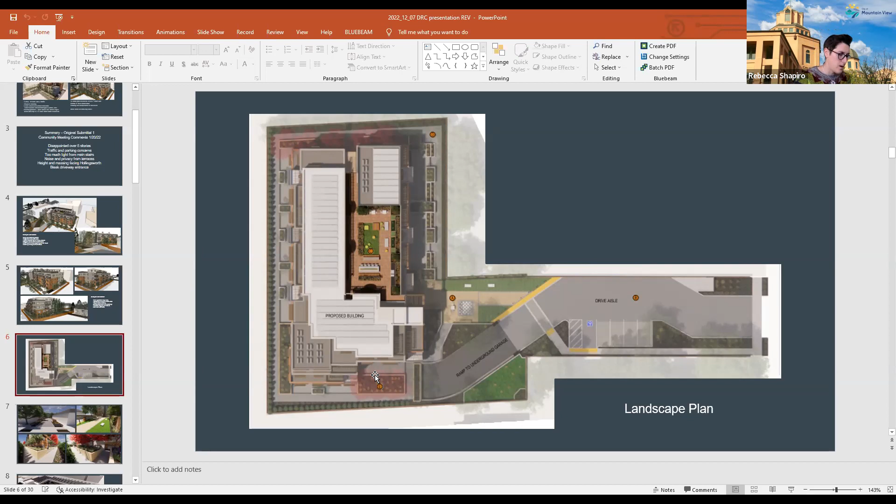That jumps us to the building design, and I think we're going to start out bigger picture. Really what many of our comments and recommendations today are... let me take a step back.

I think we're well aware of the feedback you received from your neighbors with concerns about privacy and the scale of the building. And I think from an overall massing perspective, we sort of generally support the strategies you've implemented to try to scale down and reduce the visibility of the upper floors.

I think the challenging thing as a design review body is trying to reconcile a lot of those privacy concerns and in some ways the bulk concerns, because the design solutions for each sometimes run counter to each other. A building with less window to wall area is going to look chunkier, because there's less openness, more solid wall area. So we went back and forth with thoughts and recommendations on how you might further create a lighter and airier building while also addressing privacy concerns.

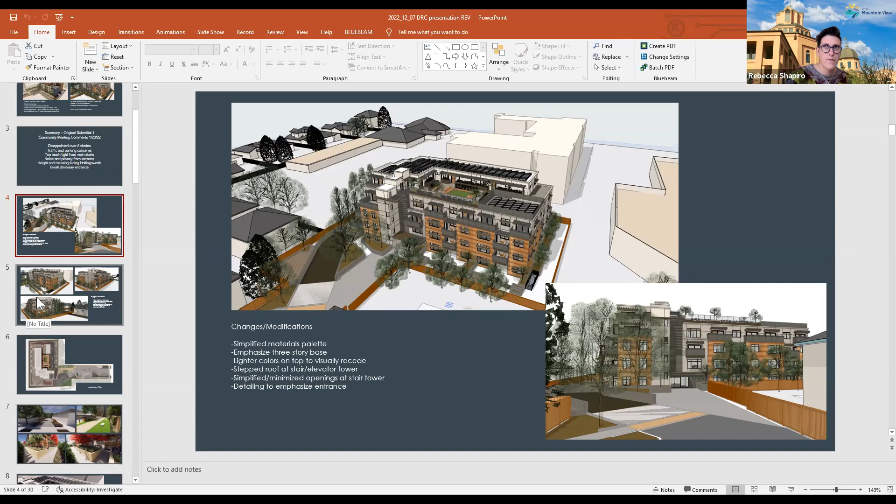So I guess, do you have a view of the building that shows us the building from the southeast, or sorry, the northeast corner of the site? Could you zoom in on that, maybe upper left rendering?

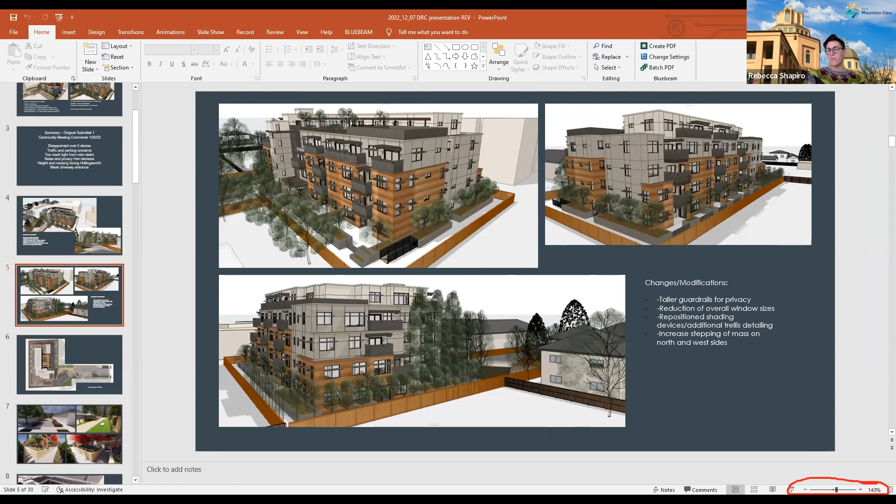So I think there are a few things we observed that were really legible in the design. What we saw in the building is that you have this recessive body of the building that is the stucco element, and then reading proud are these Prodema siding clad elements.

One of the areas that caught our attention as being awkward is these side elevations where you're sort of pulling it through. Could you speak a little bit to how the material transitions on the north elevation to the stucco fourth floor?

Yeah, I know what you're getting at here. Pulling it through, as opposed to stopping it, was initially the thought to try to emphasize that 3-story base and introduce that language to this side of the building where it's otherwise continuous. The strategy was that, it's no secret, these two walls on the two floors are in alignment. So the thinking was to play with molding, so to speak, using the Prodema material to provide some relief at that transition, so that when you step back, you read that 4-story mass as broken up, with that material wrapping around the corner from the front.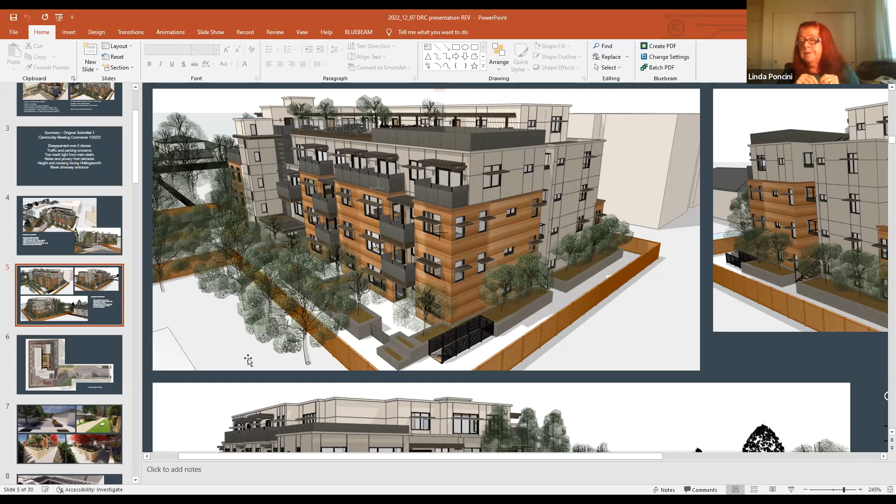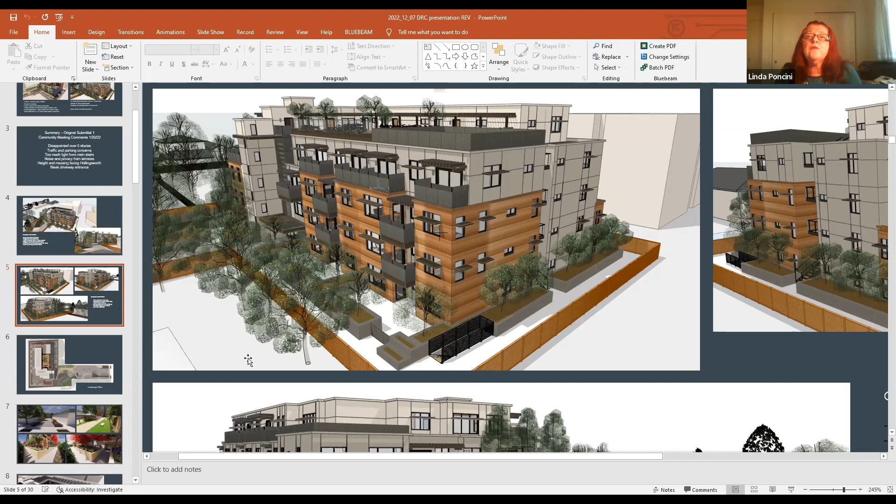I'll also say the same thing I said about the siding: the Bok Modern product is quite expensive and will look really beautiful. But you do need to select the right pattern, and ensure that it's a product you're actually going to be able to afford for the project, because those balconies and railings are a prominent feature on this building and this design. So I think that has to really be taken into account.

I'll just add, I've seen a lot of projects incorporate Bok Modern, and I don't know if they have different ranges available that address affordability. The other thing I've observed is Bok Modern—I think they want you to buy their products, but it can also be sort of inspirational. There are a lot of different ways to procure materials, particularly metal railing type materials, from a variety of sources.

So the overall feedback for you is, obviously, the project that we review needs to be the project and feature the things you're indicating are part of your design. So make sure that, to the extent feasible—and I know there are a lot of variables only really quantifiable later—it's something you think you can reasonably construct. But we also know there are a variety of ways you can maintain design quality while sourcing from other entities. So we look forward to what you come up with there.

We also wanted to talk a little bit more about the 4th and 5th floor massing.

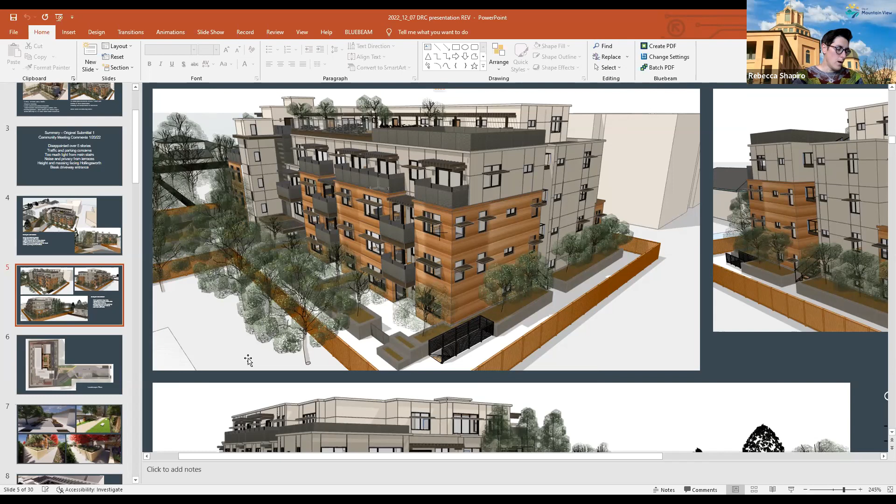Broadly, we support your approach, as I mentioned earlier, of stepping in the 4th and/or 5th floors at these, particularly the side elevations or the elevations that are more visible to the residential adjacencies. There are a few things that we'd like you to further evaluate.

First, on this south elevation, you have a really nice, simple, orderly approach to your articulation around the building, but then things get a little weird on this south side. So we thought there might be some areas of simplifying the approach on this facade in a way that makes it a little quieter, with the idea that it might be less eye-catching from afar.

Our experience is that kind of variability tends to draw the eye. One of the things we saw was this variable, like the zigzag to your balconies, and so we'd encourage you to look at options that simplify and align—maybe the balconies get a right edge that falls into play, and maybe the 3rd and 4th floor balconies have a complementary appearance.

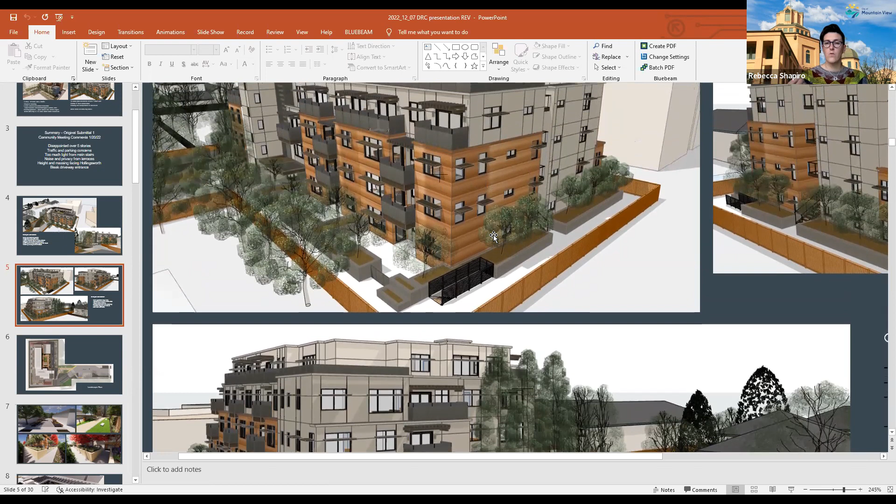I know you've got a little less room to play with, but we wondered if, for example, at that northwest corner, where you're not proposing to wrap the Prodema, there might be some ability to pull that 2-story element around with a little relief to do something similar to what you have going on that south facade. You might not be able to do the same for this element here, but we noticed the planar condition of that northwest corner, and thought that the other elevation you have might give you some opportunities that could apply there.

We also, in some ways, your 5th floor reminded us a little bit of when someone retrofits a factory building and adds a penthouse floor to it. There's a variety of approaches there. I think sometimes when we have stepped back upper floors, when that upper floor has real solidity to it, or is sometimes too tall, the more solid and blocky it is, even though it's inset, it still is really eye-catching.

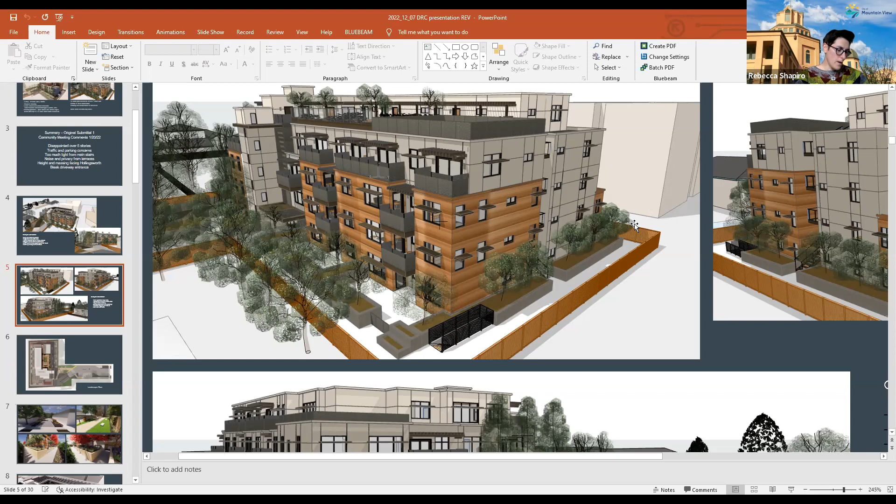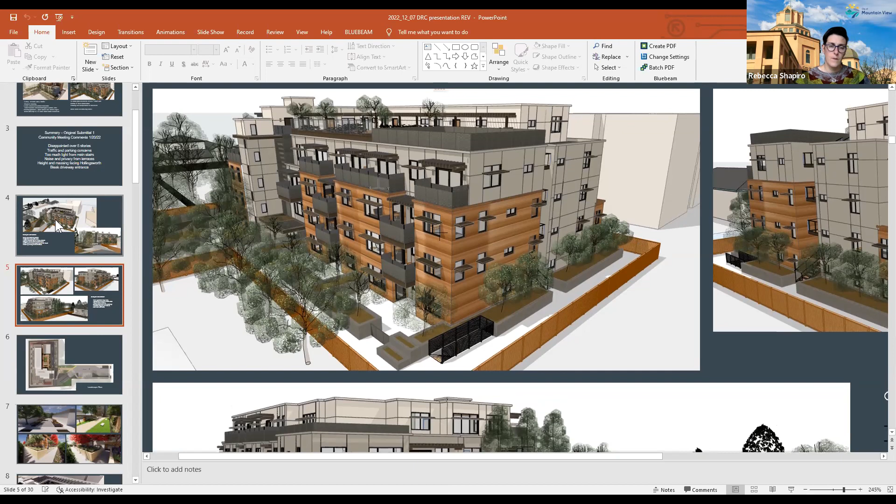And I think probably one of the last areas of the building that we wanted to talk about was this sort of entry stair and condition.

So this was an area where we recognize, I think, that what you were trying to do was, in combination with addressing community feedback, to do something distinctive that highlighted the entry. But it also felt like the one area of the site where your design diagram broke down a little bit, because we would have kind of diagrammatically expected this sort of stucco to read through, rather than getting this material.

And I think we understand the why, but when we were looking at it in elevation view, one of the thoughts we had was, what would make a lot of sense as far as highlighting the entry and integrating the stair, which I think are the two objectives that we have for this area of the building, is what needs to relate to each other.

And the thought was that what needs to relate to each other is this and this. And then kind of this volume is maybe something that fits into the building and is quiet behind it, would be one approach. And if that approach is workable, then this overhang maybe goes away.

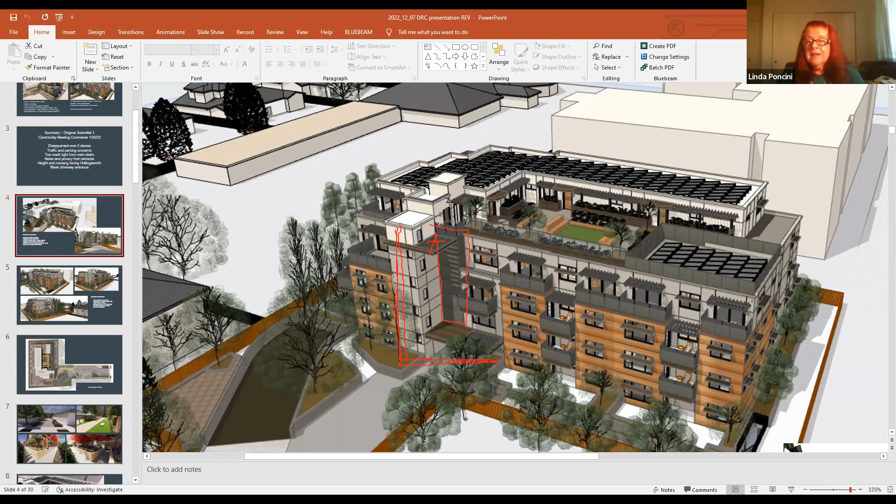One thing that we discussed in our briefing was the stair tower. My analogy was, if this were a commercial building, an office building, we would say, make that stair tower glass, make it transparent, make it a focal point, something that is, because it is a large mass, it's tall, and it steps up even further back towards the elevator overrun, and so it could be a real feature element.

But we understand that the input you got from the public was that they didn't want to see this stair. They didn't want to see people going up and down the stair and all of that, and they were concerned about it. So I think that area in general with that form, as Rebecca said, look at the material on that wall.

And again, from this view, it's interesting seeing how those windows at the corner jump up and down. And gosh, if that whole element at the very corner had a different color, a different feeling, so that it doesn't read as a bunch of little punched openings in the corner.

So I think that there is a lot to be done with this general area, how you emphasize the entrance, how you make that separation between the mass of the building wing to this anchor of the stair tower, and then back to a building wing again. It's key, it's like a hinge or a knuckle that needs some study.